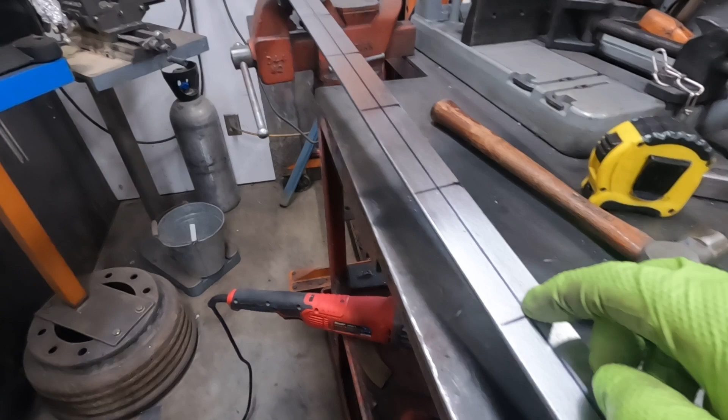So here's my dash piece, or the lower rail. I went every 4 inches, putting in a 1/4 inch hole. I figure for mounting stuff under the dash or even in front, I can mount to it later, and this way once it's painted, it's already threaded. I blocked out where the steering column is, but these are just random 1/4 inch holes for later. I've mounted enough things in vehicles before to know that you never have enough holes, so I'm gonna get these put in. I'm not gonna bore you with drilling it, we'll come back when that's done.

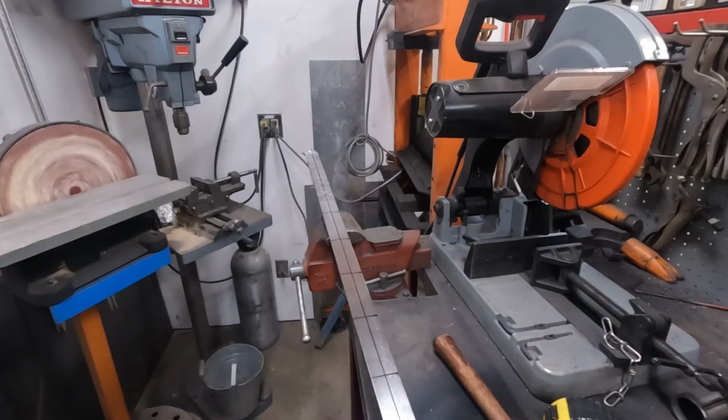Okay, I lied. I'm gonna let you watch me drill these holes.

So gonna put 1/4 inch threads in there. I think that's 3/16 - we're gonna gamble on it. That's what I get for remembering - it's not 3/16, it's 13/64.

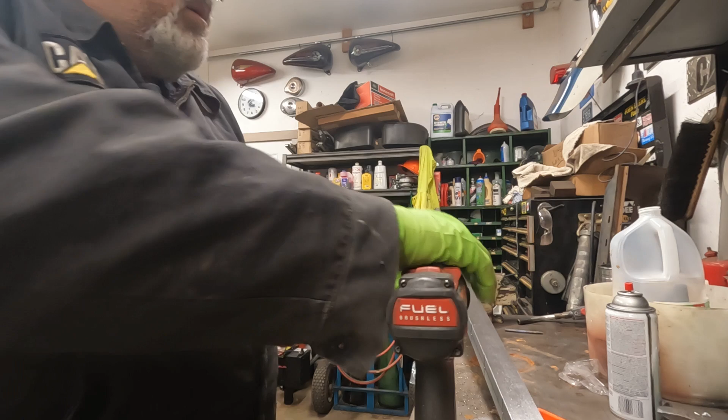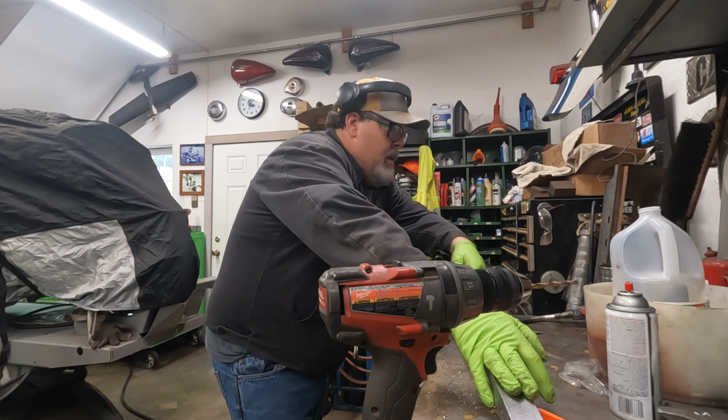So I probably should drill the face of it also for mounting the dash panels on. Before I weld that in, I will probably do that just for ease. I mean obviously I can do it later, but I'm gonna do a little bit of math there, and maybe we can put those in and hopefully work with it.

So again, something I don't normally do is use the tap. I watch a lot of guys on the internet do this, so we're gonna see if we can do this without breaking off the tap. Mine's shiny and new, so I'm sure we'll snap it right off. So that works - didn't really like that very much at all, but it did work really well and really quick. I guess weigh out the cost of a broken tap versus your labor.

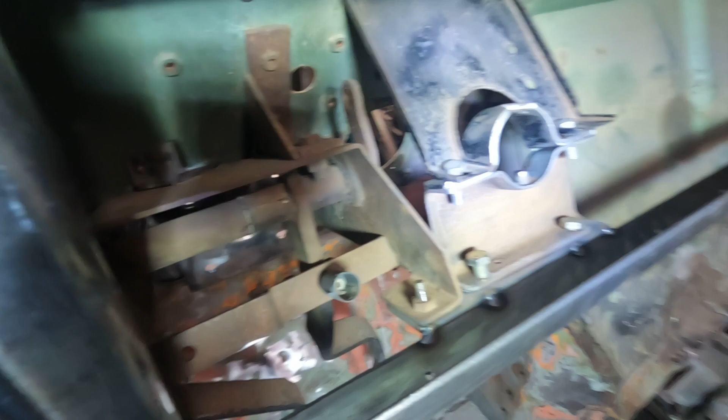I got a little sidetracked working without the camera, but I built the bracket that ties into the clutch and brake pedal, and it also ties into the base of the dash bar. So we just got that tacked in there for right now. Those bolts that are standing up will have nuts welded there so I can put bolts in from the bottom, because of course most of that's going to be blind once the dash is in. All I did was mirror basically what connected to the old tin dash, just connected it to my roll cage.

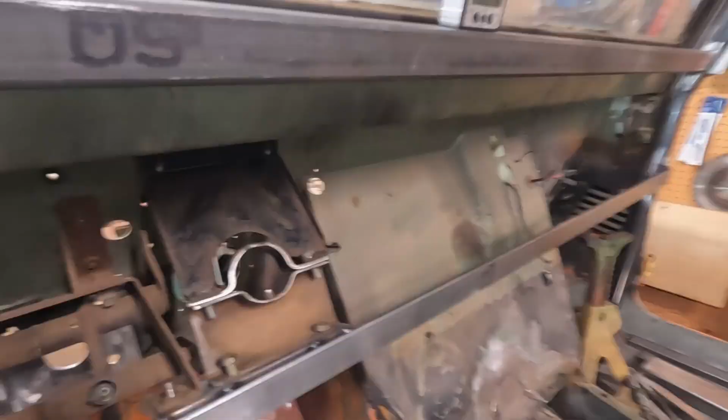So, working on a little bit of CAD design here. I like the look of my dash panel inside this. With it on the outside, it just looks like I'm putting a piece of flat aluminum up there. This way I'll have color differentials. The roll cage will probably be black. The dash may end up being the same color as the Scout, so it'll be a nicer look.

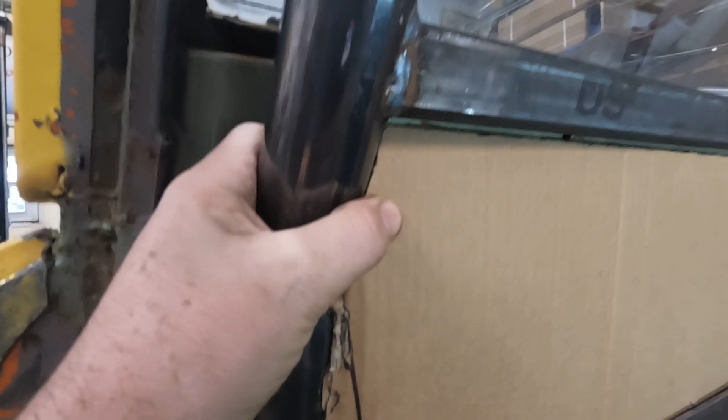And I think I'm going to put a lip under the dash, just enough to bolt it so you get a little bit of deviation, and it's just enough that I don't think I have to break that. I think I can just bolt it in and we'll be okay with some 1/8 inch aluminum. So we'll see. At this point, I don't know.

There will have to be a little bit of a break right here. I'm going to play with that probably in sheet metal before I screw up some really expensive aluminum. So we're just going to go from there, see what happens.

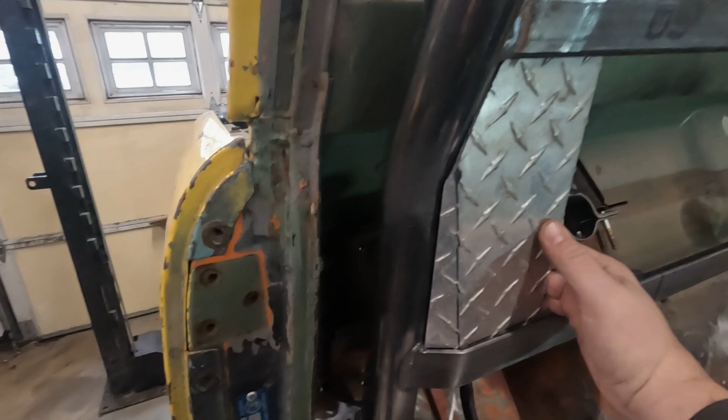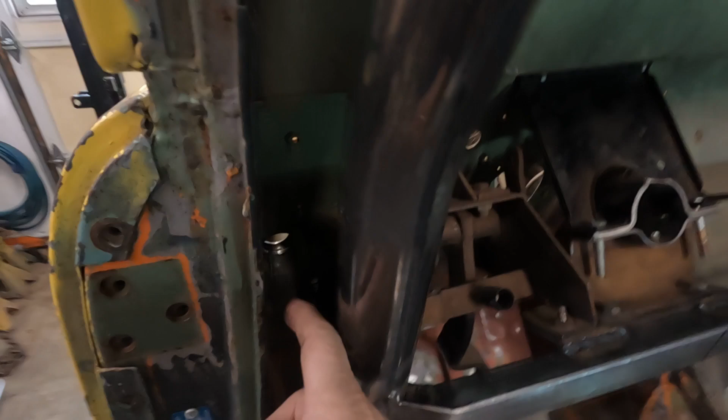So I'm just forming up some scrap aluminum here to try to get my configuration and how I want the piece to go in there. I still have this void, and I hadn't decided completely what I wanted to do with it, but I still have the factory screw holes. I have the factory dash bolt. I've been waffling really hard trying to make this decision, and just because I didn't want to cut up a

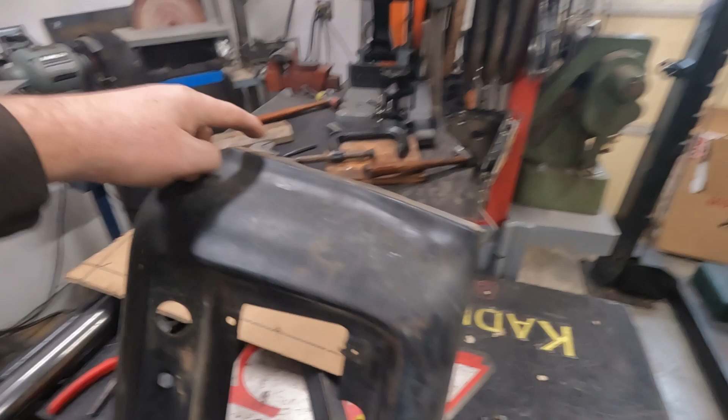perfectly good dash. But I think what I'm going to do is we're going to cut the factory dash off right here, and I'm going to build a filler piece out of this piece because it's got the spot for the factory bolt hole and the factory screw. So I think we're just going to hack this off, bite the bullet, ruin a piece of Americana, all for the sake of looking cool. So let's do it.

So I'm just going to eyeball it, going to cut it off, and then I'll start to carve it down because I have no idea where it's going to fit. So we're just going to take the cutoff wheel and hack away at it.

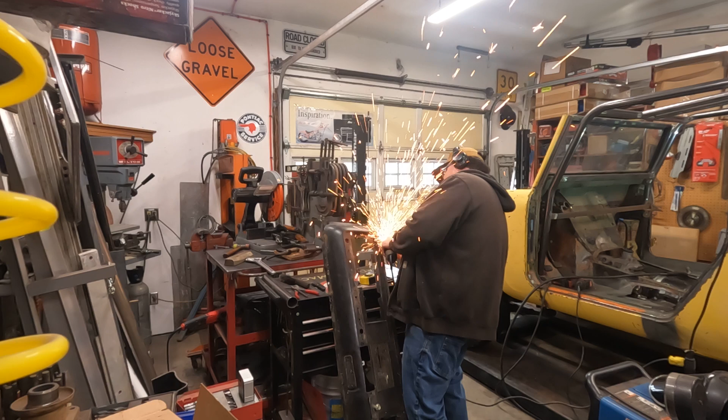Cannot believe I just did that. It hurts inside a little bit, but let's try to build a filler piece.

So I'm carving off more than I wanted. I'm going to try to roll this out a little bit and try to keep some length there and just see what happens. So here it is in its roughest form. We might put a little bit of flashing on the edge of that. I don't think I want to connect it to the roll cage because any kind of flex will just break

that. It's sheet metal, but fills that void. Doesn't look too bad. We'll probably do the same thing on the other side once I get this thing turned around, but yeah, I think it looks pretty good. A little bit more forming and see what happens.

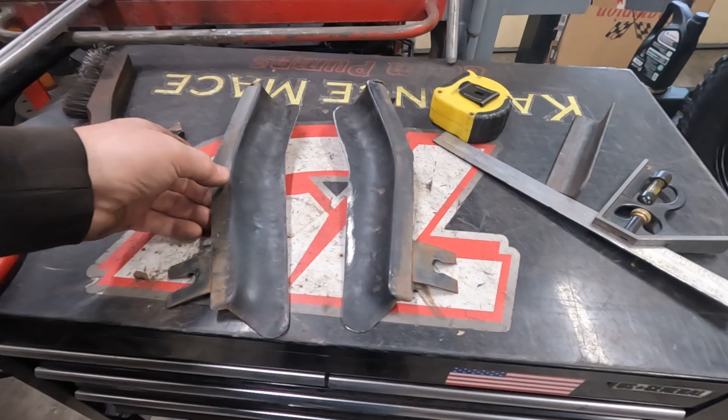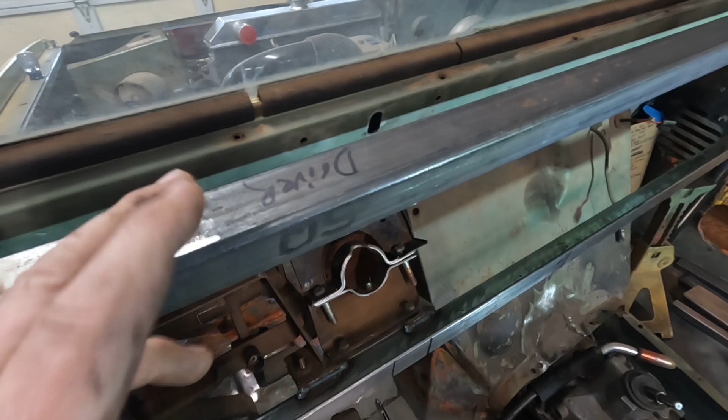So there is my left side. There's my right side. Did give me an idea because I wasn't sure how I was going to fill the gap on top between the dash and the windshield. I was going to build a piece, but I may be able to utilize the factory dash piece and cut it. So I might play with that a little bit and just see what that turns into. And we'll go from there.

All right, guys, I slept on it on the dash last night. My plan was to go down to the iron place and have some 1/8 inch aluminum sheared out to start building my dash panels. But 1/8 inch, well, let me back up. I'm not sure I want to go with aluminum, other than the ease of drilling the holes in it. You know, I don't know that I want a bare aluminum dash, so I'm going to paint it.

So I have a bunch of 16 gauge that I had left over from doing the inner fenders. So I think I'm going to at least try to cut one of the panels out of 16 gauge, and we'll just see what that looks like, feels like. I can always replace it with aluminum later, but I'm gonna play around with some sheet metal, and we'll just see if it's too tinny.

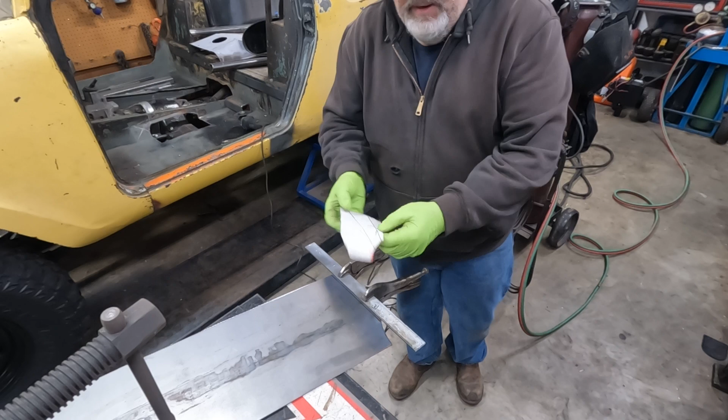All right, here's my test dash piece. I cut out the little corner piece that needs to be folded like this. My brake in the shop doesn't, I don't think I'm gonna get that fine of a bite on it the way it's designed. It's not a finger brake. So we're just gonna go a little old school, put a little heat on it and bend. Like I said, don't need much of an angle.

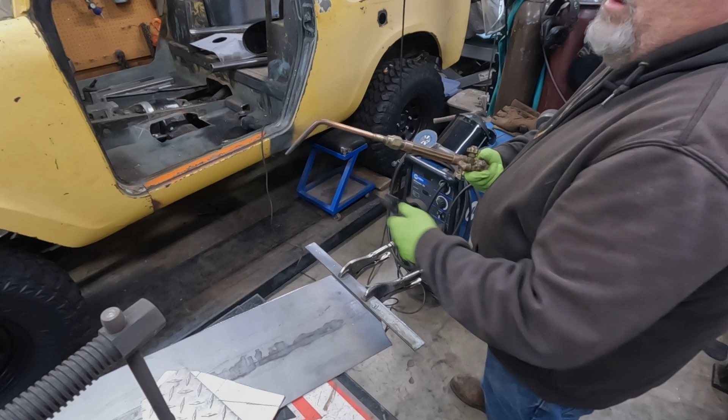This is the one I did yesterday in aluminum diamond, just for testing, and there's not much there. Haven't used a torch in a while, got to bleed the air out of the lines. Okay, going with a smaller tip, I want a little more control. I'm gonna end up with way too much heat, not directed where I want it.

I'm not going to be able to get this hot enough without overheating this sheet metal. That's one reason why I cut this plate extra long. If I have to cut this end off and start over, I will. Yeah, it's not doing what I want without getting super hot.

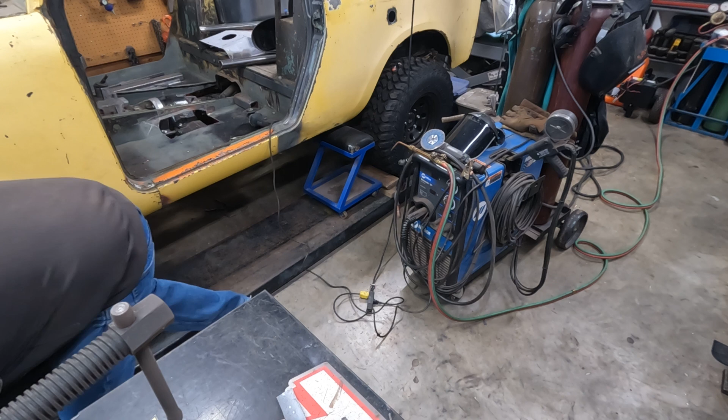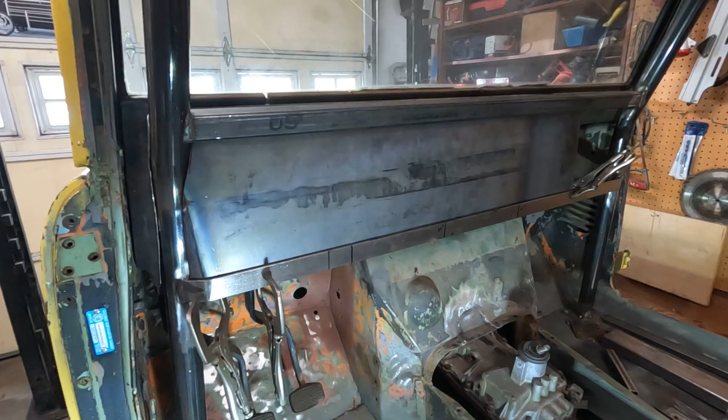Probably gonna have to trim that, it's way too far back. Okay guys, this took way too long, but I got one side fitted here. I probably got 3 hours into this, and I'm still moderately happy with it, but it's slightly beveled back. There'll end up being a plate underneath the dash to bolt to, and then we'll bolt through here into the dash. You can see that fitment there, it's not bad. Not sure if I'm gonna need to put something behind it to keep from rattling, or a tab, but we're just going to play it by ear at first and see what happens.

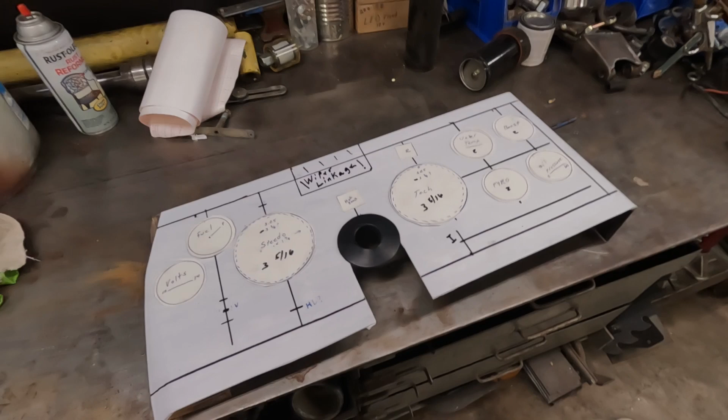So I got a little carried away, guys, and the other evening I was not going to do this without filming it, but sometimes you just start doing things and it gets away from you. So here's my dash layout, I'm pretty happy with it. I covered it with shelf paper, which gives you a good spot to draw with your Sharpie and your lines and everything, but that's what it's looking like.

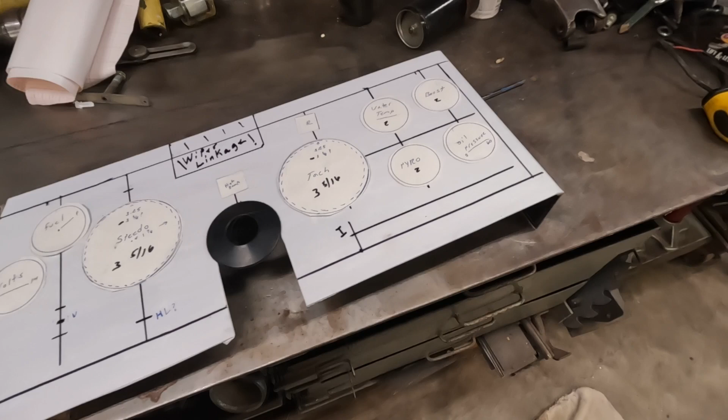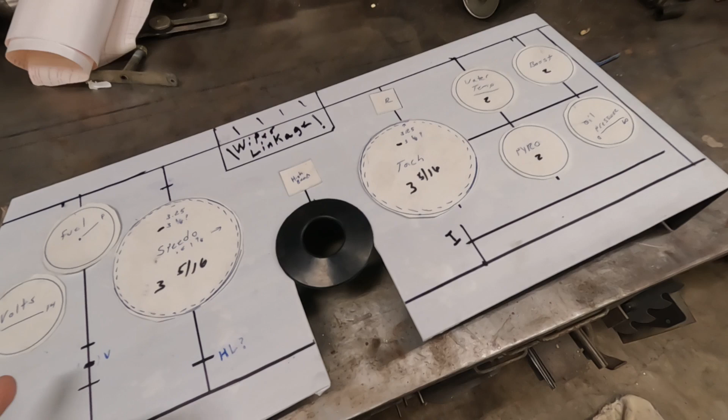I need to measure out for, I'm going to put my ignition here. I need to measure out for the air conditioning, or the heat fan and defrost stuff, and then headlight switch. I have a voltmeter here, maybe oil pressure there. I don't know, I have an hour meter, but I did roll this edge over. It will get trimmed off about 1 inch, and that'll stick in the dash. There'll be a cover here between the center of the dash, it'll make more sense. I'll pre-drill this - if I ever want to put any kind of stereo or anything in that panel, I'll have some bolt holes that I can utilize that are already there.

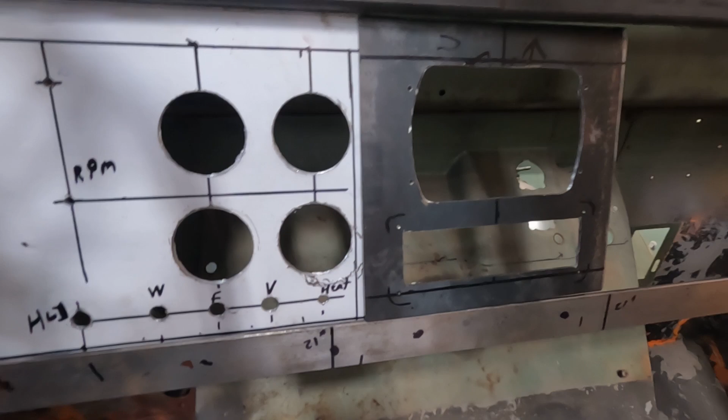Still waiting for the 3 3/8 hole saw, and I need my turn signal indicators before I drill those. I did make a mistake - originally this was going to be the headlight switch, I don't know what I was thinking. I drilled it for the ignition switch, so now the ignition's on that side, headlights will be on this side. Got the stereo and the switch panel cut out for the 6-pack of switches.

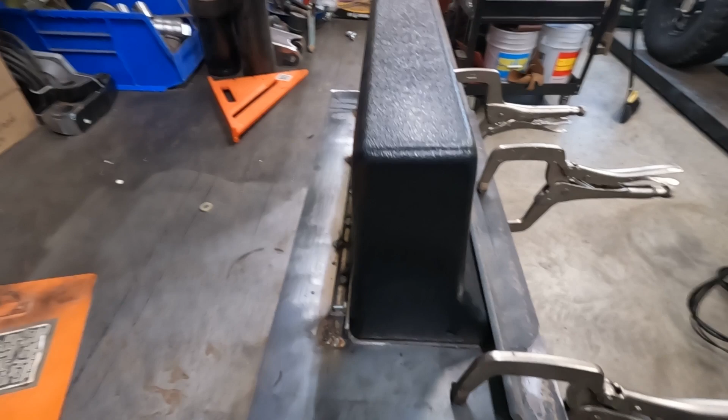Mounting the dash, or the glove box, in the panel. Coming along pretty good. Like I said, I used shelf paper, just stuck it on there, was able to draw my layout and everything.

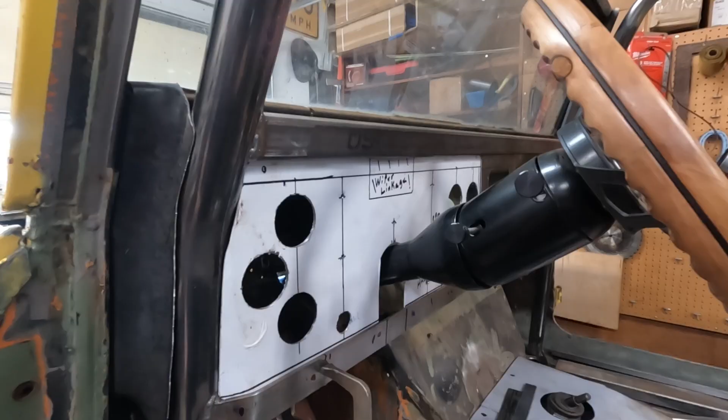Well, that's it for this episode, guys. We're wrapping up the dash here. You'll get to see it again when we do the wiring, and probably do some paint on it. When the roll cage comes out, we still have some finish welding to do. It'll be on the back side, and we'll probably go through installing all the gauges in it.